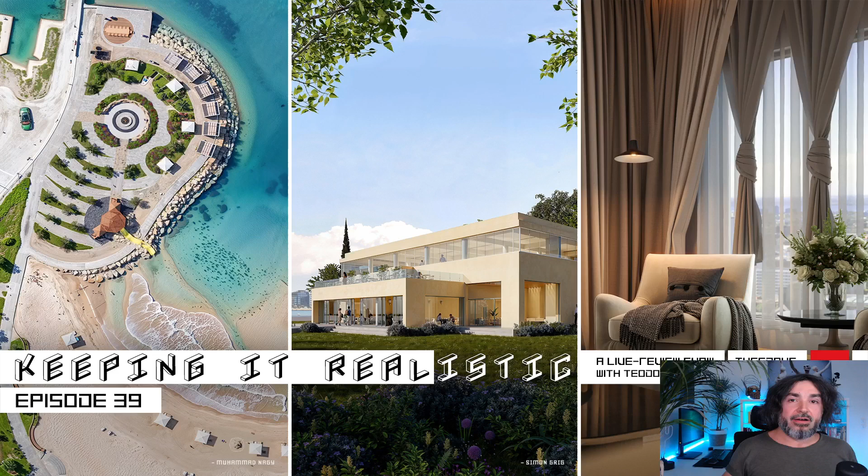Amit says, relaxing for 2 weeks now as Diwali festival is on, taking time for my family and friends finally. Well, this sounds absolutely amazing, Amit, and I'm very, very happy for you because at least in my priority list, friends and especially family is the very top position. So spending time with them is actually great. I also had the chance to do so this weekend because we were at the Lake of Constance, where I used to study. This is the first city which I actually visited after leaving Bulgaria and coming to Germany to study. And we had an anniversary with my former colleagues from the Bachelor Architecture study. So I met a lot of friends and I took my whole family with me. So we also experienced a really, really good weekend. Friday, Saturday, Sunday. So yeah, very happy for you.

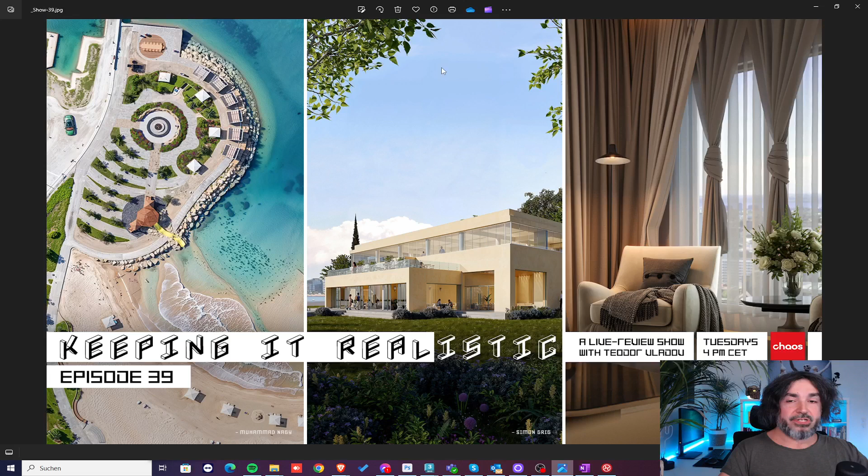Abdi joined us. Very happy to have you here, man. You're right on time because after appreciating our cover image triptych, we'll take a look at our other cover image, this time the Facebook group's new cover.

You know, we recently started doing this, that during the show I present to you a selection of 5 images and afterwards I make a post about it. You can, by the way, find it among the featured posts. It's up here. And when you click on it, you can actually vote for the images that you like the most. You vote by simply giving the image that you like the most a like. In this case, it is the image that won out. It was a very close call. Probably it was a real thrill which image would be winning. In the end, it was Raphael's, and even though I like all of them, I completely agree with your choice, and I think that our new cover looks really, really nice.

And we can, of course, click on it. I always try to place the Chaos Campus logo in a way that it fits within the image, and I think in this particular case it actually does. It's very nice, I love this minimalism, and I think it very nicely fits the group. Also, our first two covers were pretty dark, so having something brighter for contrast is actually pretty sweet. I hope you like it.

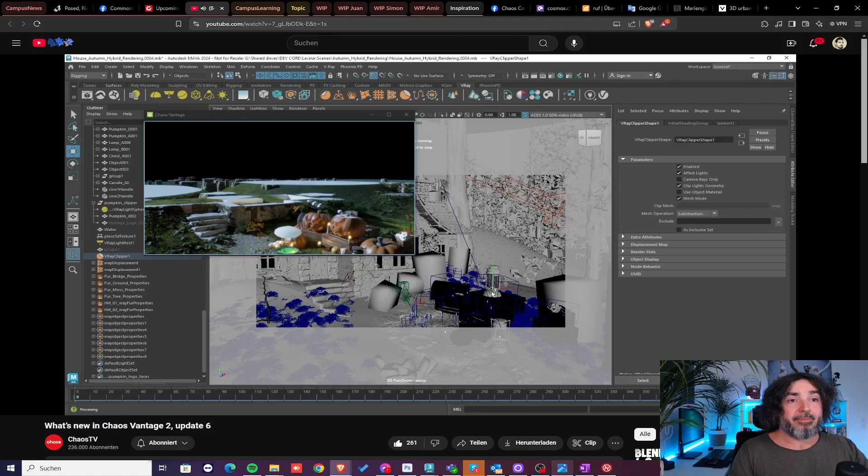We have VR controller support - I'm planning to buy a MetaQuest 3 this year, so this is great to me. Also wireframe overlay, very easy to set up, and I'm very happy about this because from time to time we need something like this. And something that may seem small but to me is actually a very big topic: cameras are now actual objects that you can move around, rotate and so on, which will make camera setup even easier. I'm very happy with this change.

You can just watch the video if you want and see the whole list - oh sorry, I just switched to another video. Just take a look and see what the changes are, but it's very promising. I'm planning to do a scene specifically to test Vantage with next, so I'm happy I'll get to try out most of these new features.

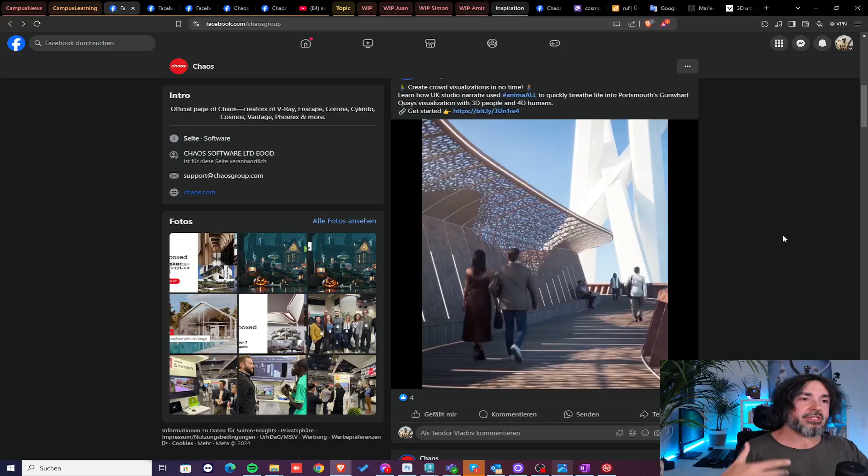By the way, the scene you see here is also the cover image of the official Chaos Facebook group. You know this group, I show it on every show - there's always something new and interesting in it, videos, tutorials, news, announcements. The difference from the campus is that you cannot share your own work within this group, you can just look at stuff or comment on stuff shared by Chaos themselves. But this is where I found a video about Vantage and many other news and articles.

And this is where I also found this one, this very short teaser about the upcoming Chaos Envision. I'll just quickly check the comments.

I see Ahmed joined us. He says, 'Hi Theo, nice to see you. How are you?' I'm very fine. I'm very happy that we get to hang out together today again. And thanks for asking, how about you, man?

Abdi says that will allow a much more flexible way to animate the cameras in a good way. Yes, the new camera as an object in Vantage is something I was missing, even though I'm not much into Vantage. But the times I experimented with it, I always felt it was an issue that the camera wasn't something I could see or move around the way I'm used to in Max.

So yeah, I'm very happy about this change, even though it's not the most significant among the new features. Anyway, back to Envision. This teaser doesn't really show much, apart from Envision being a render engine with which you can also animate, contrary to Enscape which doesn't really support animations. So Envision obviously does, but what is it? It doesn't say anymore.

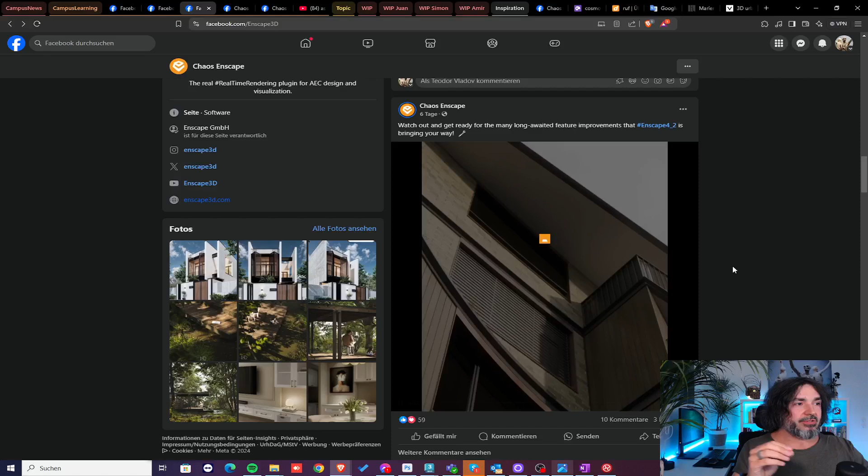I think just because it doesn't support animation and the images aren't that photorealistic doesn't mean it's obsolete. On the contrary, if you want to see something more concrete in your conceptual phase, if you want a good previs solution, or a real-time preview of your concept, where you lead people around like in a computer game, this is a very good way to do this. And I see more and more architects actually using it.

Next, we have Vantage. Vantage is actually more similar to V-Ray and Corona than to Enscape, because it's not a raster engine, it is a ray tracer. However, in this case it is a real-time ray tracer, contrary to V-Ray and Corona. This means what a ray tracer actually does is simulate the interaction between the light rays and the surfaces and their specific surface properties, but it does it in real time. It's once again aimed at 3D artists.

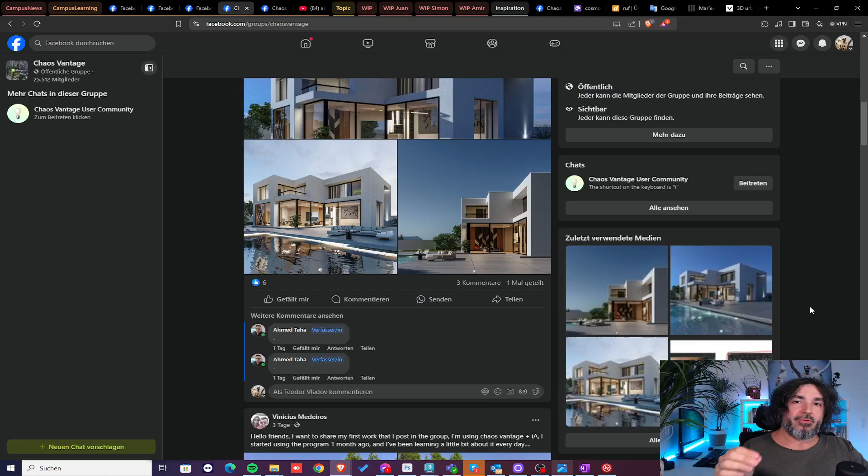It's again very quick and easy to navigate and use. It supports animations, as you know. It's still not quite as realistic as Corona and V-Ray, but it's slowly and steadily getting in this direction. The other drawback is that it definitely requires more computational power, so you need an RTX card, and the better the card is, the more fun you will have using Vantage.

So if you followed up so far, you know that 3D artists or digital content creators have Corona, V-Ray, and Vantage for themselves, the ray tracers, offline and real time. The others, architects, engineers, designers, the CAD people, they only have Enscape, which is a raster engine. With Envision, the way I understand it, they will also get a real-time ray tracer, but it will be more towards their needs rather than ours as 3D artists. It will still be very quick, easy to navigate and use, and it will support animations, contrary to Enscape. And as an architect, you won't need to necessarily learn 3ds Max or Corona or V-Ray in order to use a functionality similar to Vantage.

I sometimes see in 3D groups people or 3D artists who do the modeling work in ArchiCAD, for example, or in AutoCAD, and then they have to go over to 3ds Max in order to be able to use V-Ray or Vantage, which is quite a long way. So these people will now have Envision.

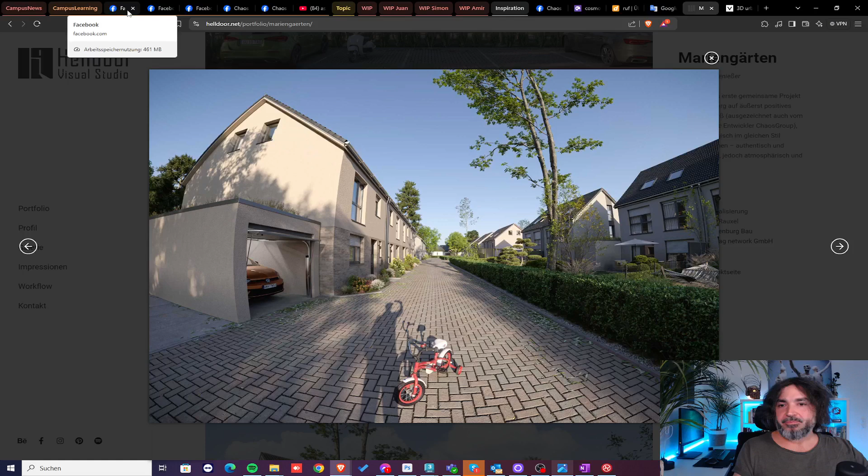Okay, I think we had enough of learning, news, and so on. Let's briefly check out the topic. And this is nothing new, actually. We have a project visualization challenge going in the group currently, and this is what I want to remind you about. There is an official post about it. So if you're up here, among the featured posts, the last one is the challenge for October. And if you click on it, you will end up here.

And there you'll find all the information needed for you to participate in this challenge if you feel like it. So yeah, project visualization, this is what we're doing. What you need to imagine is a scenario where a client reaches out and wants you to visualize their new project and depict it in an appealing way. If you want a bigger, longer presentation about this, just watch the previous episode of the show, where there is even a lesson, let's say, accompanying the challenge announcement.

So more or less, what you need to do are 2 things: model and texture the project. It doesn't matter if it's something existing, if it's something that you found the plans on, or if it's an imaginary concept you came up with. That's everything's okay. And then in the second step, visualize the project in an attractive and fitting way so that it's desirable to the target audience, or even to a wider audience.

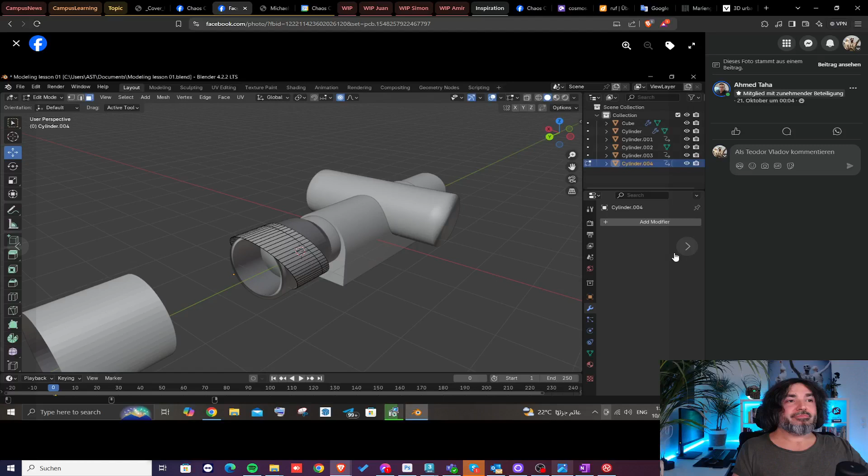He's also shared like a million screenshots, which I really appreciate, but you don't have to do this. You can just share 2 or 3, and that's more than enough. He shared all the steps. This is a campus, this is a community where we learn from each other. So doing something like this is actually pretty sweet. I appreciate this, but don't feel obliged to. Just wanted to tell you.

If he wins, of course, this in the end depends on all the other submissions. But to me, and I'm being very honest here, the participation is already a win. And I know this sounds corny, I know this sounds like loser talk. It's not important to win. It's important that you participate.

But believe me, with going through life with, I wouldn't call it wisdom, but the more I spend time on this earth, the more I believe in such corny stuff, because on the way to a potential win in a challenge like this, you will be faced with a new situation and you have to learn to deal with it. You will definitely gain experience through it. You will face challenges that you have to overcome, and this will also help you grow. Eventually, you learn a new skill, you'll check out a new tutorial. Your self esteem will grow through it, your horizons will widen, and this is something nobody can take away from you. This already is an objective win.

Remember, if you want to climb Everest, you're not in your room one moment and teleported there the next. No, you do it in small steps. You just go to the base camps and walk up in your small everyday steps. And it's the same with growth as an artist. You just need to take your time and do all those small steps, and at some point you turn around and you see how far you've actually gone.

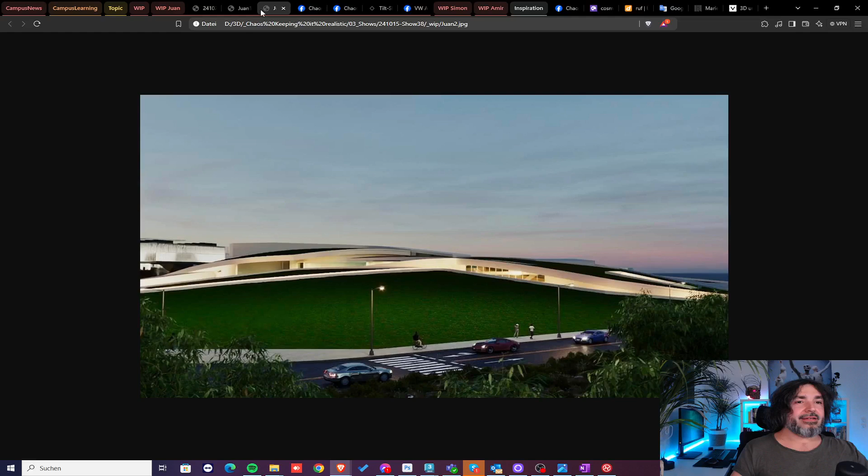In the second phase, it was a bit of a letdown. I gotta be honest, a bit sobering, because the sense of large scale that we just saw on the very first part of the project was completely gone now, and we just had a hill with some cuts in it, and this wasn't impressive anymore at all.

Luckily, at the third stage, which is something we talked about on the last show, he returned to the initial concept, showing this structure alongside its urban context, which makes a lot of sense. So also the sense of scale was now back. However, the angles were a bit flat, so it was difficult to understand and see the whole structure from those flat angles. And also the city looked kind of generic and lifeless, missing this lived-in feeling of the big city. So today we will talk about stage 4 of this project, where the two main issues I just mentioned were addressed and, if you ask me, properly dealt with.

He writes, work in progress. Hi friends, I present to you the progress of my project. I changed to a more appropriate view for an urban scale project, and I think I managed to give it more life and make it feel more like a city, taking into account all the advice.

I absolutely agree, and I'm not the only one here. Danushka says, hey Juan, huge leap in progress in my opinion, really cool work. Amit says, hey Juan, it's a nice and huge progress from the previous versions. And it definitely is. Let's take a look at why.

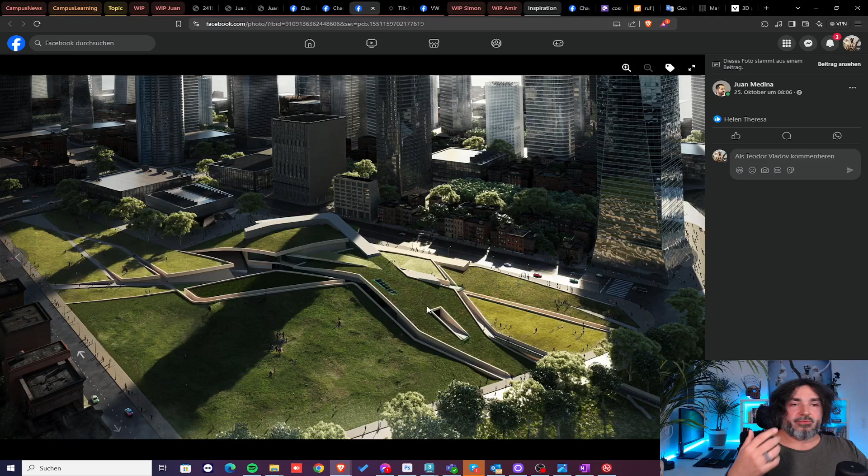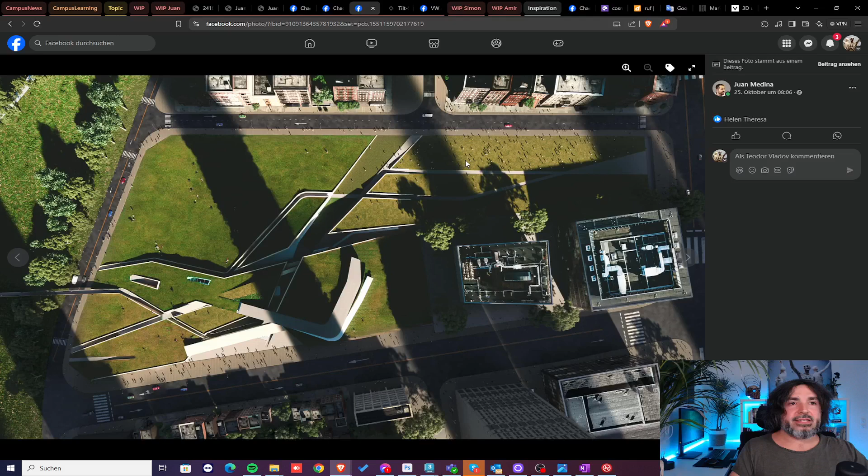First of all, the urban context is once again very present. And with a structure like this it's absolutely essential, because it helps better understand the concept behind it, and in turn the concept integrates way more harmoniously. Until this point, to me all those lines were more or less random, just so the thing looks cool. Now that I see it from above, I can actually understand the design. I see that all the entrances this building has are situated where we have some urban openings, or some pedestrian crossings, where we have a lot of people, which of course makes a lot of sense. Also, it seems like this structure is oriented around those two buildings, which I assume were pre-existing here, or not, I don't know - this is something one should say - but suddenly we get to actually understand this whole thing.

And this is huge. The next topic is that the city now really feels lively. Prior to this phase, it felt like a generic static background. Now, if we take a look at the images, you see how with those lots of different buildings with different facades, we have this lively street infrastructure.

We have the street markings, the pedestrian crossing, the street lamps, all of this. We have a lot of urban green, and we have tons of vehicles. It's great to see not only cars, but also a van here and there. I would also recommend adding a bus or a lorry, a truck, whatever you want to call it, so that it looks even more random and lively.

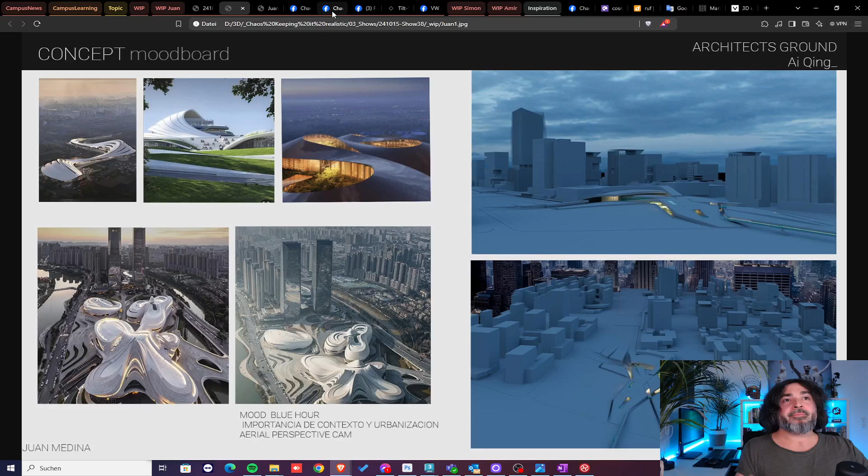So now let's take a look at the issues and the stuff that you may need to work more on. First of all, the major issue to me, and not only to me, to your fellow artists in the comments, is the lighting here. First of all, it is too bold, it is too contrasty. If we look back to your references, you see how soft the lighting is on all of those examples. Even here, where we have direct sunlight, you see that there are no shadows that interfere with the buildings depicted, the buildings that we want to focus on. In your case, however, the structure gets literally overshadowed. This is what overshadowing means, is the shadow over it. It's just not good. And why? Because your structure is already very fragmented.

Let's try to showcase this a bit. Okay, so we have many lines. I'm sorry, I'm drawing with my mouse.

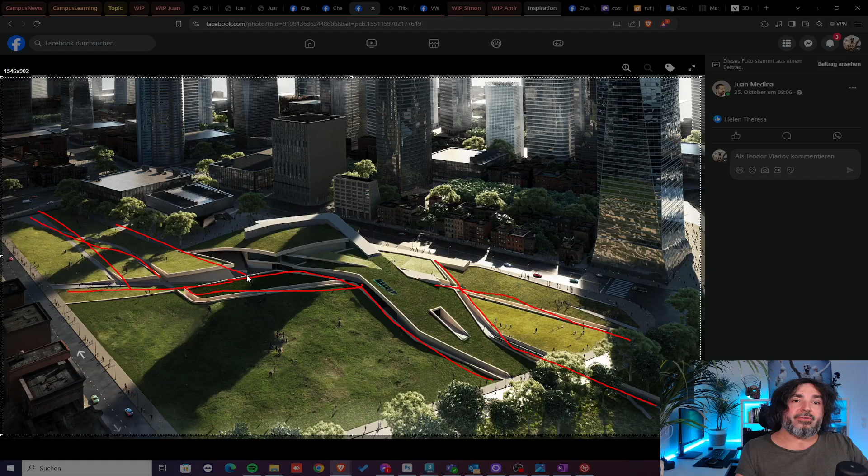But you see all those lines that intersect here. There are really, really many cuts, sections, leading lines, whatnot. And what you do with those shadows is you add further ones. You add further structure and fragmentation to your already very fragmented concept. You shouldn't be doing this.

I understand this is probably lighting that could happen in real life at some time of day in this particular city. But if this is the case, then this simply is not the proper time of day to depict this building. Remember, professional photographers, half of the work they do is not the photo shooting, but the preparation for it. Depending on the project, they would sometimes spend a whole day around an exterior building they have to photograph, walking around it, trying to see at which point which light comes where, when there are lots of people in front of the building, where there is nobody, and stuff like this. So you gotta experiment with this as well, because in the final phase of your work, you are actually a photographer, a virtual one, but still.

So what you can do, of course, is, as your fellow artist suggested, change the sun angle. If you did a daylight simulation here and can't just randomly change the sun angle, try to go for maybe a noon time, because at noon the sun is usually quite high and the shadows are quite short. If you are free to change the sun direction however you please, just rotate it so there are no long shadows atop your structure, but somewhere on the side. I understand why you like those long shadows, because especially with people it looks even more lively and atmospheric. But if it doesn't work, shadows cannot interfere with the main hero of your scene.

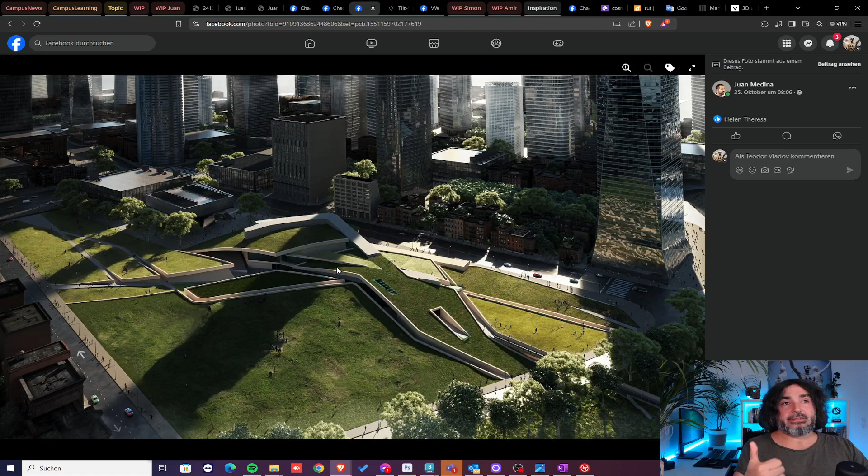Of course, it will look even better with an evening mood, but also during the day, because now you've moved the camera further up. And now that you did so, we can actually see through those gaps what's on the inside. For this to feel safe and welcoming to people, you need to show that there is light inside. First, the light will make sure people understand that something happens on the inside - these aren't just cuts and ways through this field, something is actually there. Second, people will know they can feel safe going inside, because if I look at this or this here, it doesn't look that safe. It's dark, and honestly, the opposite of inviting.

Now, when we talk about the lawns, Amir mentioned it, and in the first part of my review I also said it's a good idea that they aren't exactly equal. But the way they are now, they're too different, which makes for a restless, disorderly look of the whole structure because there's just too much going on. Remember, you already have all those cuts and sections, so you don't really need much more for this structure to be interesting. If you add more, at some point there's a lack of harmony in it.

Also, this dark green lawn - it seems like it's been done with AI, most probably, or it could be matte painting. Whatever it is, it looks too wild, too unkempt, like it belongs on a mountain slope, but not in the middle of a big city.

So my recommendation would be to give your lawns a more uniform look, the same type of grass. I personally like those parts here, and I'd recommend taking the grass you've used here and using it everywhere. Of course, you can do slight variation - for example, to the saturation, hue, and gamma. You can easily do it with the Multi-Map in Corona or the Multi/Sub-Texture map in V-Ray if you're a V-Ray user, so there's still some changes.

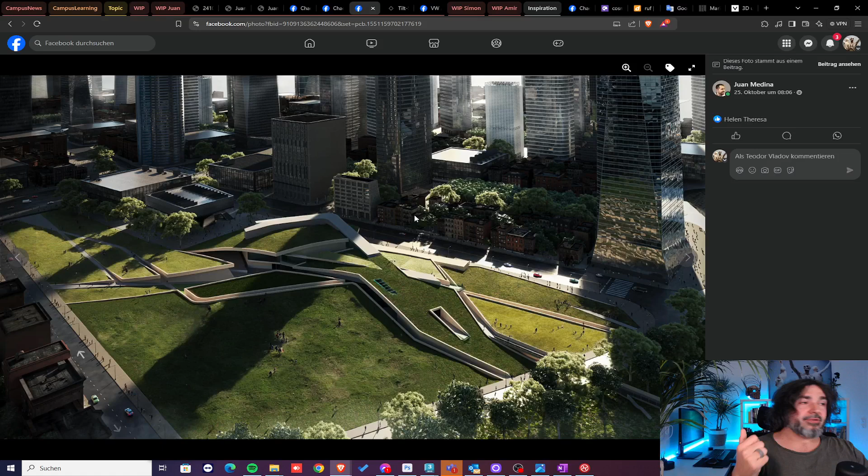One last thing, the background. Currently it's visible that your surroundings come to an end at some point, and this isn't good for realism and authenticity. What I recommend is either use a backplate, maybe placed on a semicircular plane, scatter some further generic buildings or trees in the back, or try an AI solution—see if it can fill those gaps with some city continuation. It's really important for upholding this big city atmosphere you're establishing here.

And I think that was it. It's a great improvement since last time. I was very happy to see this fourth state of the project, and I'm actually very proud of your progress and hard work. It's a huge project—a lot for a single artist—but you're doing a great job. Similar to Amir, I'm also waiting for your next phase or the final outcome, whatever comes.

Juan says, thanks Theo, appreciate it. Amir says, good knowledge sharing on the greens, Theo, appreciate it. You're very welcome—this is what I'm here for.

Okay, let's continue with another work, this time by Simon. You're also here, man—I saw you in the beginning. I hope you're still here because we're now an hour in. So this isn't an ongoing one; this is a new project and almost finished, or at a very advanced state for sure.

Simon writes: work in progress, hi all, just a bit boring building, trying to make it kind of interesting. It's located in the port of Athens, Piraeus, Greece. Rhino, V-Ray, and Photoshop for images, Runway for the video, just based on the existing renders and some simple prompts. Looks promising, still some hallucination as with all the AI out there. Comments are welcome. Have a nice Friday.

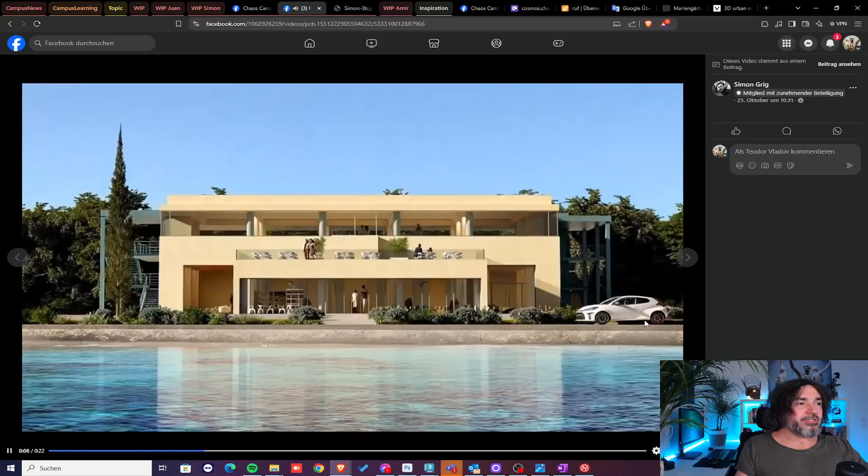And finally, we have the video, which simulates a time lapse. I probably should remove the sound just to be sure. It brings all those three situations that we just saw to life, but adds more dynamic and more emotion. You see the sun setting down here. To me, it's actually a lovely experiment. It's good to know what AI is actually currently capable of.

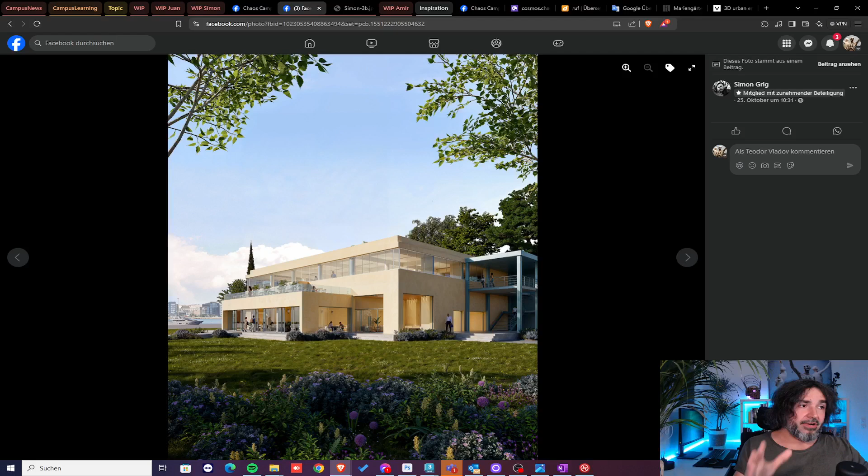So after going through all of this, I would say the framings are actually a big quality of this project because they help emphasize that it's not only the building itself that we have to look at, but also its location, its beautiful surroundings as well. They are exactly as important.

Sorry. So it's like we can analyze the second shot for this. Obviously, you can frame a shot like this, or like that, right? Because what we did cut off is a part of the sky, but we still see it here, and parts of the sea, but we still have a part of the sea still visible. So we didn't reduce the information provided to the viewer by going for a framing like this.

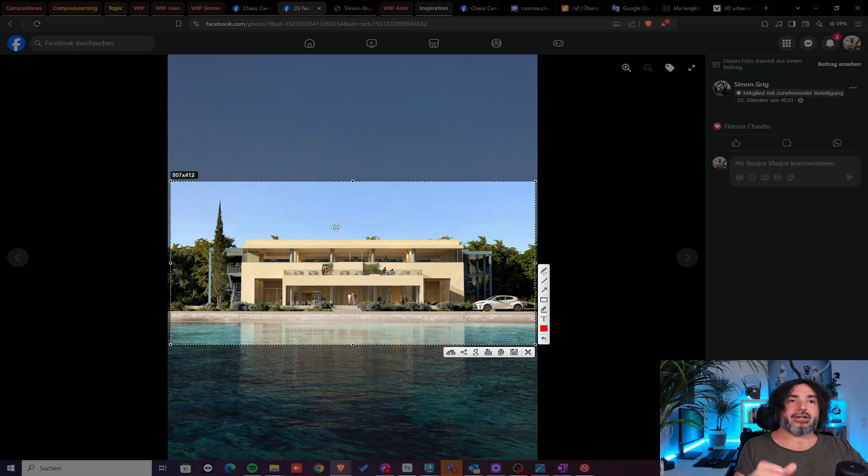However, what we change here is the message of the image. The message of an image like this is it's about the architecture. Yes, there is some greenery, there is some sea, that's good, but take a look at the architecture. While you go for this type of framing, however, it's look at where that building with this beautiful architecture is situated. It has the sea in front of it, and it has the greenery and the blue sky above it. There is so much air to breathe there. This is a different message, and something like this is important. So I think you chose the very right framing here.

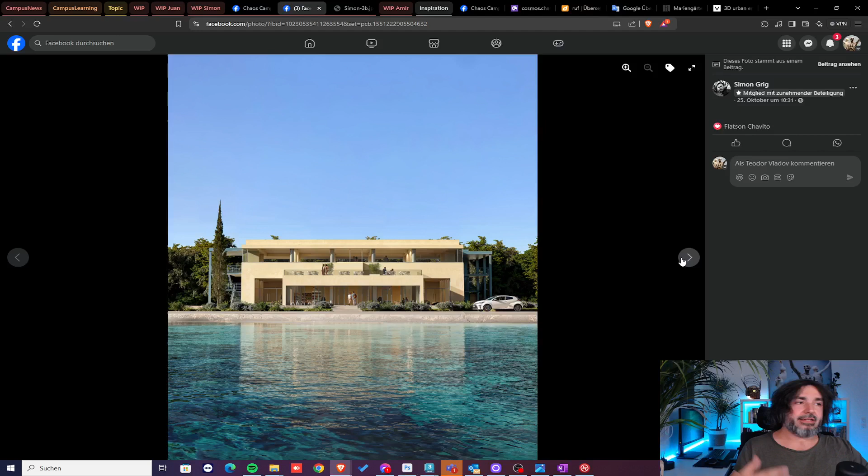Other than that, lighting, materials, modeling, scattering look good to me, especially the lighting because it's different on every shot, as I said. Now let's take a look at some issues or things that you may want to do.

So generally, I find the interior to be a bit too empty. I'm not sure what type of building this is exactly, but it can certainly profit from some interior. You see, there is a cafeteria or whatever this is down here, but some of the other rooms seem completely empty. So I would say add some lamps or wall art. I mean, if the project is finished, you can do whatever you want. If it's not finished, maybe you can convince your client.

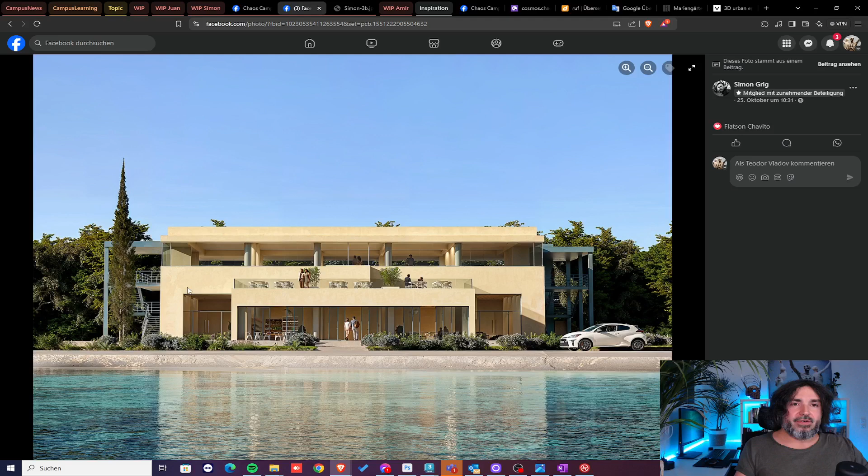Another thing that I would say about interior is that it seems like you have the same material on the in and outside of the building, which I'm personally usually not a huge fan of. I would recommend going with a different material or a texture for the inside and the outside area, so that it's more comprehensible for the viewer to understand what's an outdoor area and what's an inside area.

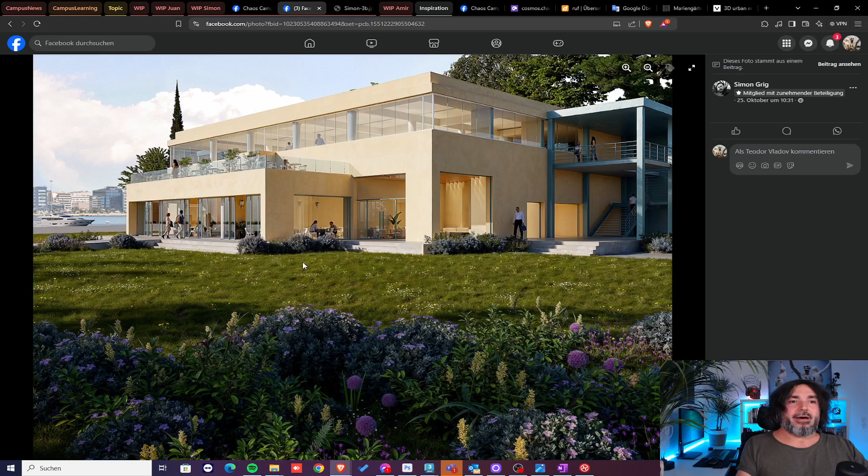Another thing is the grass on the very first shot. Let's go back to it. I must admit I'm not a huge fan of it. First of all, it looks a bit generic. Secondly, it's very wild and unkempt, and this is kind of strange given how many stairs lead into this lawn. You would think that it would be nicely cut and trimmed so that people can actually go there and use it, lie on the floor or walk through it. But the way it is now, they probably won't be doing this.

Next thing is I find these white and yellow flowers to be kind of distracting. Why? Because you already have a lot happening at the bottom of the shot. You have things happening at the top as well, and a lot is also going on in the middle. So the blue sky here and the grass field here should actually act more like counterweight, like buffer zones where not so much happens, in order for the image to not become unbalanced or too heavy. With all the uneven ground underneath the grass and all the different grass clumps and all the additional flowers, too much is going on in this area.

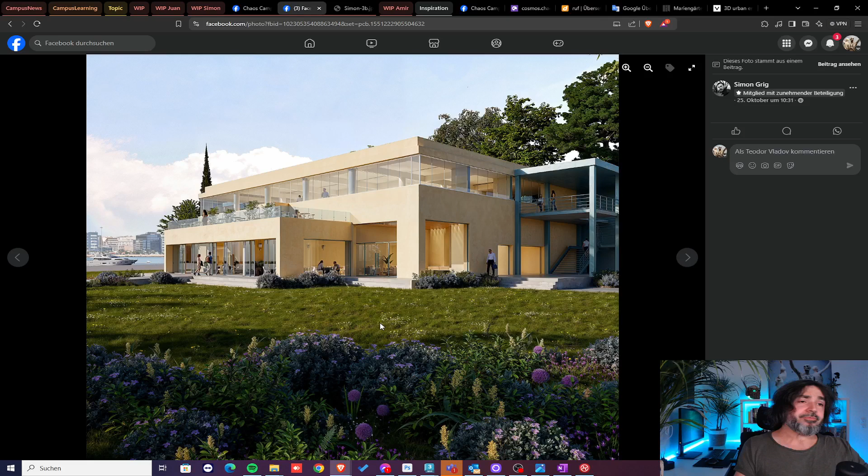So I would recommend just picking a neatly cut grass and putting it here. And additionally, pay attention to the color, because the current color that this grass has is kind of too much yellow in it. We have yellow here up as well because we have translucency.

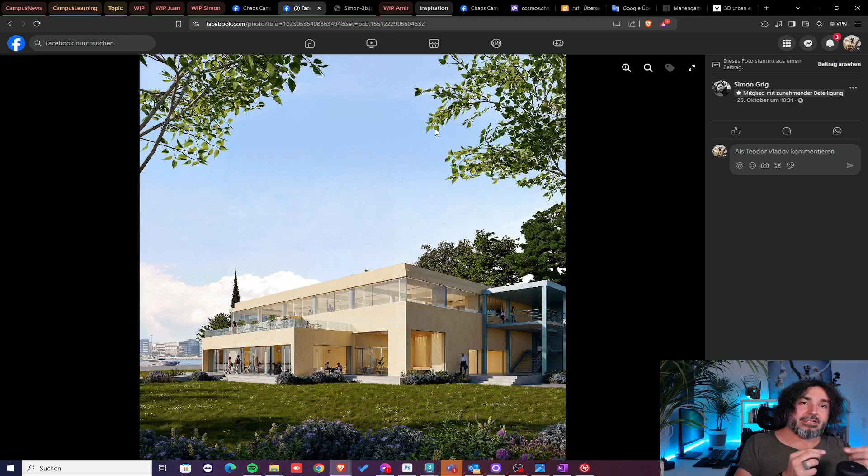As you know, especially with foliage, if we have translucency on it, we usually give the translucency map a bit more yellow so that we can simulate how the light is traveling through the translucent leaf. However, your grass here is almost like autumn grass, like it belongs in a different season, and it doesn't go well with the green on all those plants down here. So just take a cut grass, scatter it, and make it more green and less yellow, and I think it should be better.

So what I would do if I were you is extend the cropping upwards a lot until maybe a rule of thirds applies, and then also extend it a bit to the left, so that you don't cut the very edge of this fire escape stairs. So it would look more like this. I think this way it is more balanced and somehow nicer to look at, and the proportions and ratios are better. Let me know what you think in the comments.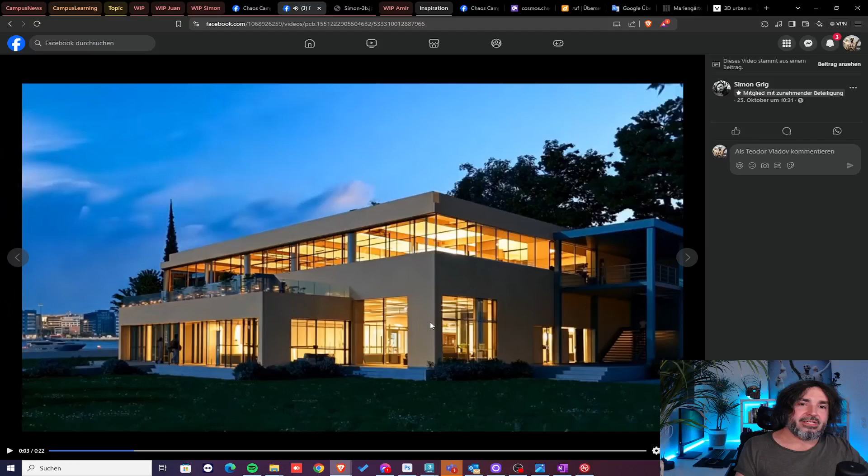As for the animation, it is of course something special. It feels a bit like a fever dream. I mean, most things make sense, but you see it here, we had those people going around in a time-lapse mode, and then we have those at the entrance that don't move at all. This, of course, doesn't make that much sense.

So if you want to do something like this, remove all the static people before doing it, and then do the prompting so that there are people within the limits of the building. Then we have the second shot where the people, once they enter the building, they start morphing, which is, of course, kind of creepy. It's fun for us to watch it now, of course.

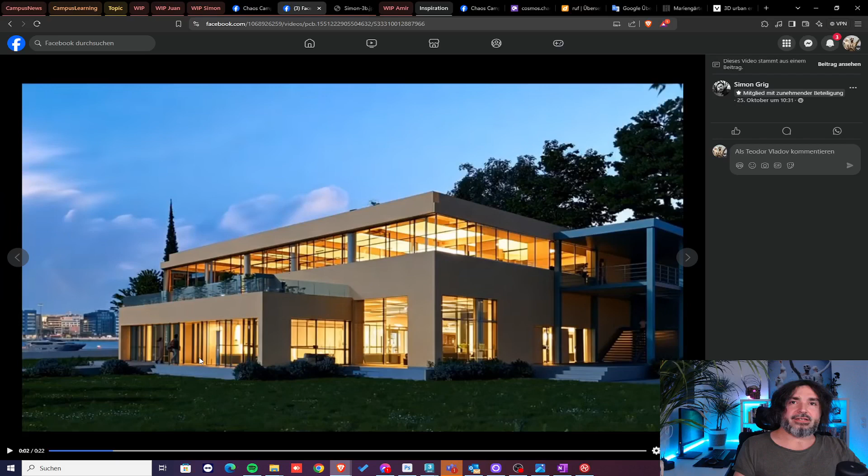What should I say? It's a great experiment, but if I were you, I wouldn't share this video in my portfolio or on some official channels, because it can be bad for your reputation. Somebody who doesn't understand that you're just experimenting, like a potential client, may think this person doesn't see obvious mistakes, and maybe the explanation that it's still some hallucinations as all the AI out there wouldn't make sense to them. So if I were you, I would leave the video out, but I still think it is an awesome experiment.

With that being said, to me this is another great project of yours. You've been very active lately and sharing all those really cool projects. So the only thing I have to say is please keep them coming. They're a pleasure to look at.

So thanks for the advice. They're all really helpful. I admire Mir because they many times do these weird framings and I'm trying to go out of my comfort zone.

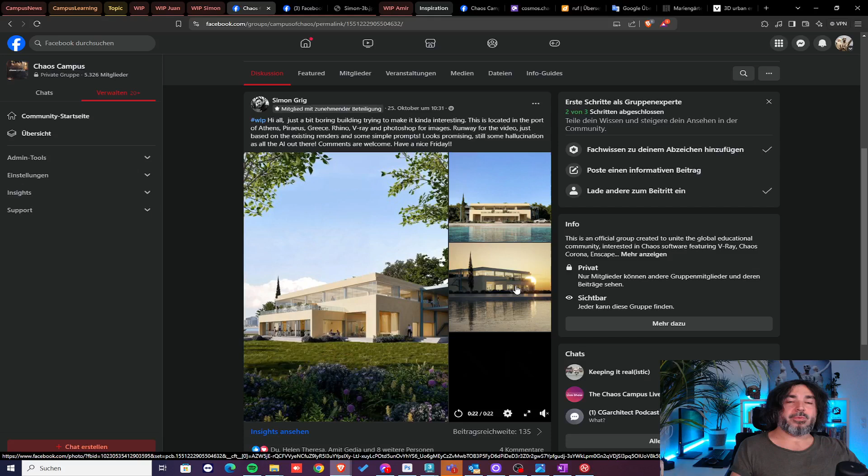You mean like on the third shot? Well, of course, you can do this as you please. Sometimes breaking the rules is also pretty cool. At the end of the day, it's up to you.

If you like the image the way it is, then it's good. I personally like it more like this because to me the building still is the more important part of this image, and I also like the sky gradient as well. If it was all yellow, I probably wouldn't like it as much, but I like how it starts going into blue. So to me this adds some further dynamic, but this is one of those things that it's up to you. It's subjective. Just do what you feel like. I'm just sharing my opinion here.

Let's move on to the last work in progress we'll be talking about today. It's by Amir, another one which is not ongoing. It's new, and it seems like it's in the light balance phase. It's not the very early one because there's already a lot of detail, but it's still not textured. Let's see what he has to say about it.

Work in progress, it's an administrative building. Feel free to comment your feedback to improve it. And he has tagged me.

Now Amit asked a very reasonable question: Hi Amir, it's a good looking shot, but I'm not sure whether you just shared this for us to know that this is the project you're working on, or do you require any help with the project? Kindly specify if possible. This is very reasonable because, as we said, we will be doing those work in progress days, we also stated that we don't want people to just throw the current state of their work out there and expect everyone to start commenting.

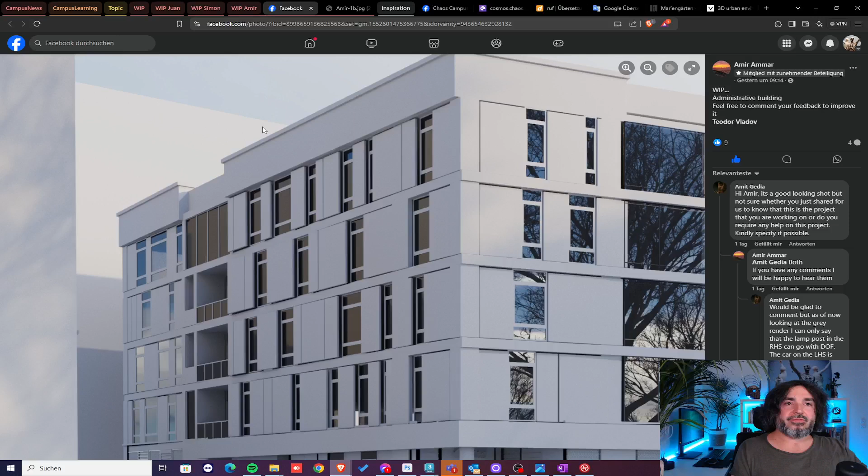The next topic is the modeling, and there are some different issues here. First, you have some hovering elements — this hydrant, the building to the left, and even some facade panels seem to be levitating in front of the facade. Next is the Volkswagen Beetle — you see a part of it here to the left and one to the right. I love this car, it's really cool, but nowadays it's also pretty rare, so seeing two of those in one scene is highly unlikely. I'd suggest you keep one, but swap the other for a more casual and regular car.

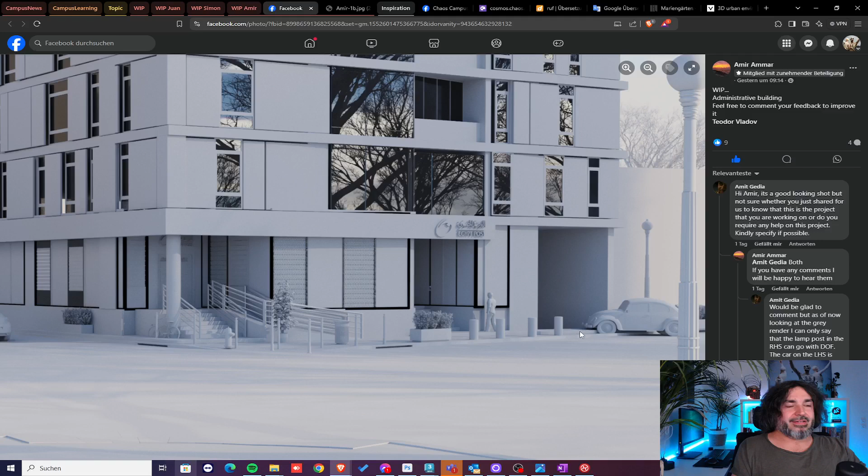Next, the surroundings obviously need a bit more detail — you need proper curbs, and a ramp for this garage entrance, because currently the Beetle really needs to climb over the curbs or sidewalk, which doesn't look comfortable or safe for the car. And of course the surrounding buildings need facades. When it comes to more detail, the interior also needs it — you can hint at it with 3D assets from the Cosmos library or your own, or as Amit suggested, use a parallax solution to fake it.

Parallax solutions are, of course, a huge time saver, but you need to know that if you're a Corona user, they sometimes aren't best friends. You may want to look into that and do some research if you can now use Corona with parallax without any issues. But this would be a legit solution as well.

Talking about things Amit said, the depicted season is a very good point, because what we see now is a branch without any leaves. We also see reflected winter trees, and also this soft low lighting. So I assume what you depict here is more or less a winter season. If this is winter, you need to make sure some of the plants don't really go well with winter, and that people walking around are properly clad for the season. If not, you may need to reconsider your greenery and your reflections as well.

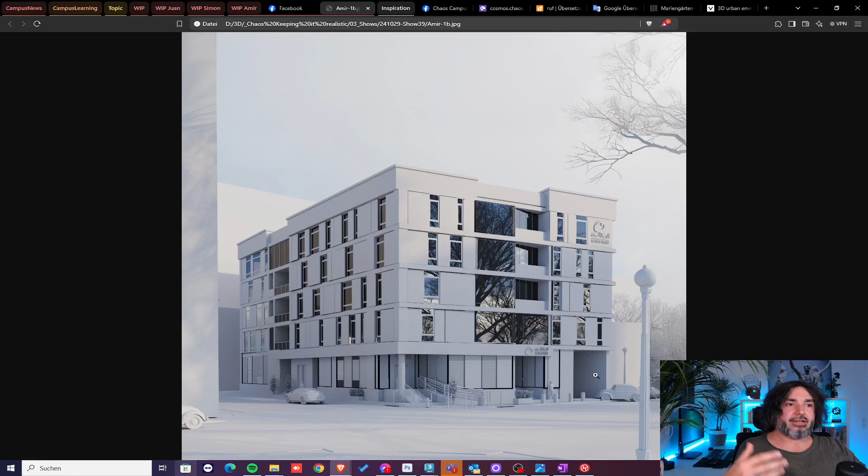And lastly, it's the framing. Currently, the framing is very architecture oriented, because all we see is the building and just small glimpses of the surrounding urban situation. What the current framing says is: look at the building. Yes, there is some situation, but it's not important. Look at this building and its architecture. If you want people to also understand the urban context in which this building is placed, you need to extend your cropping a bit, something like this. You can extend it even more to the right, since that's the main direction this building is facing, and also a bit to the top so it's not so encapsulated in this very tiny framing.

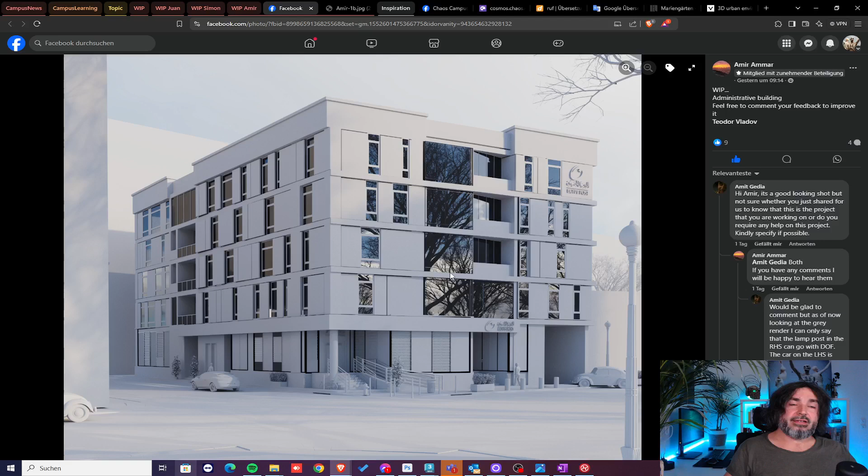But it is okay the way it is. And that's what I have to say, because you didn't have a specific question or topic to talk about, which is why I keep it a bit more general. To me, this is a very promising project of yours, and I'm looking forward to the next phase of it. But make sure you take the time to actually work on the details and make everything make sense, work, and just look good. Fingers crossed.

I see Muhammad joined us. Greetings, Teodor. Happy to watch the interesting episodes.

You'll be even more happy to see what I'm going to talk about next, because we finished the work-in-progress projects and now we'll take a look at some inspiring projects shared in the group within the last two weeks. Last time, as we started our inspirational phase of the show, we started with a seaside resort, an oceanside resort actually - the Zanzibar resort. And today we'll also start with a resort, at least I assume it is. Muhammad, you're here, tell me if this is the case.

But this time it is the Bukshanopur Palace in the Kingdom of Saudi Arabia. Muhammad says: hello campus, we're excited to present some of the beachfront CGIs of Bukshanopur Palace in KSA. Modeling, art direction, and visualization are crafted by Nagy Studios, thanks to 3ds Max, Corona, and Photoshop.

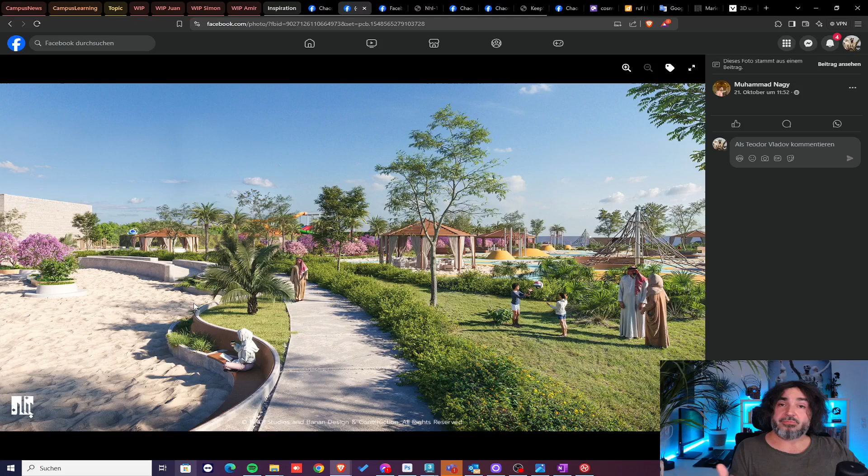Just taking a look at those thumbnails, we can already say this is a huge project involving a ton of work, and despite that it is absolutely wonderfully executed. It's incredibly detailed, as you can tell. It's very atmospheric as well, and has great modeling, texturing, and scattering too. For me, however, the highlight here are the bird view shots - they are simply amazing, truly fascinating.

Especially my favorite, this top-down shot, because not only is it very authentic and realistic looking, depicting how nature and man-made structure come together, but it's simply beautiful to look at. If this was an image of mine, I would just plot it out, put it in a frame, and hang it on my wall, because this is something beautiful. Leaving aside all the architecture and the project itself, it's just a good looking image, a pleasure to look at, at least I find it to be.

What's even more fascinating with this one is that apparently no AI has been used. And I don't say apparently because of what Muhammad told me, but because this is the way I understood it - that everything you see here, which looks so incredibly realistic, is actually the result of matte painting and not AI. Muhammad, please confirm if I got it right or correct me if I got it wrong. But yeah, I think this makes it even more impressive, honestly.

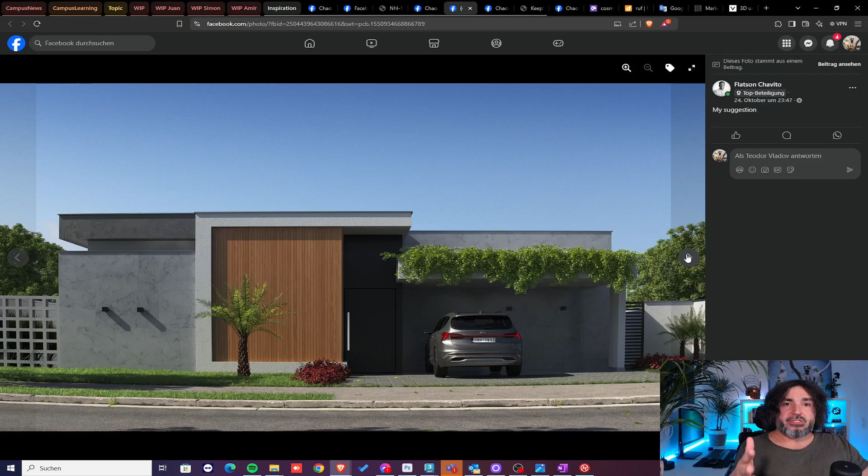Now, great description as usual. Flatson's descriptions are always a pleasure to read. Now let's briefly check the images that we have. And I would say we already see some really solid modeling, fine materials, nice framing, lighting, some scattered leaves for a more authentic look, and also good AI enhancement as well.

Sure, there are some small issues here and there. It seems like the front wheels of the car are somehow hovering above the floor. And personally, looking at the last shot, it seems like the asphalt and especially these pavement textures are a bit overscaled, but these are no big issues.

To me, the bigger issue here is that you are presenting the viewer, in this case us, two different versions of the project. This is what you describe in your description. The client opted for a more simplified look of the facade, and you thought that adding some more plants will look better, and this is your version, the way I see it. However, what you did here is a bit of a no-go because you didn't keep the same conditions, and this is a rule. If you present two different versions of the same thing, you need to keep doing this under the same conditions. So you need to keep the same camera and the same lighting.

And in your case, both are different. And as you can see, given that we have the difference in those two images, it is very difficult for the viewer to decide, because I may like the lighting here, but I may also prefer your version with the plants. But given that they have different lighting conditions and different cameras, these images aren't that easily comparable. So please keep in mind in future, if you want to present two different versions of the same thing to somebody, keep the conditions the same so that people can actually easily decide.

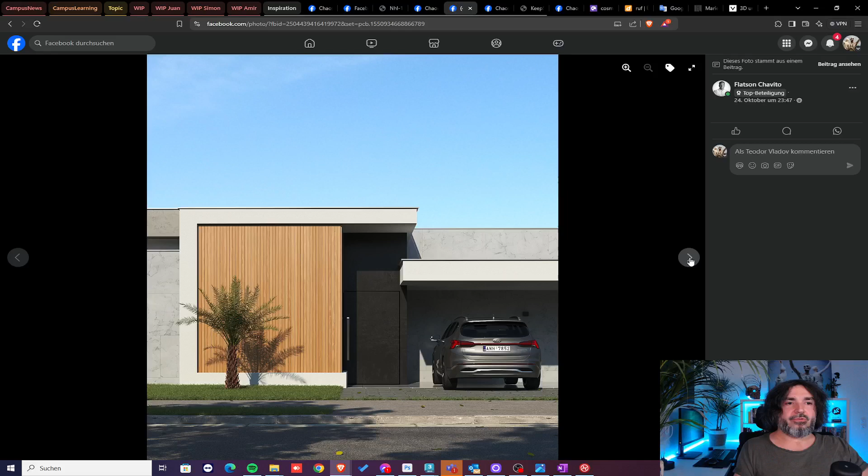But this is definitely not what I wanted to show you this project for. So we just mentioned that Ricardo was giving feedback, and he also gave feedback to this project by Flatson, and I will read it now.

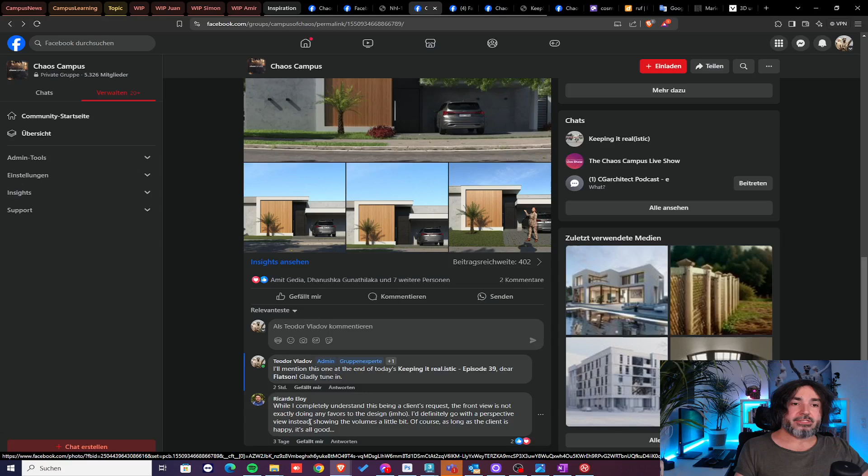He wrote, 'While I completely understand this being a client's request, the front view is not exactly doing any favors to the design, in my humble opinion. I definitely go with a perspective view instead, showing the volumes a little bit. Of course, as long as the client is happy, it's all good.'

And I absolutely agree with this. This definitely isn't the most exciting facade that I have seen in my life, and it definitely also doesn't provide any further info about how the house actually looks like. Is it small or is it big behind this facade? Is it flat or is it placed on a hill and it has an amazing view? We don't know anything about this.

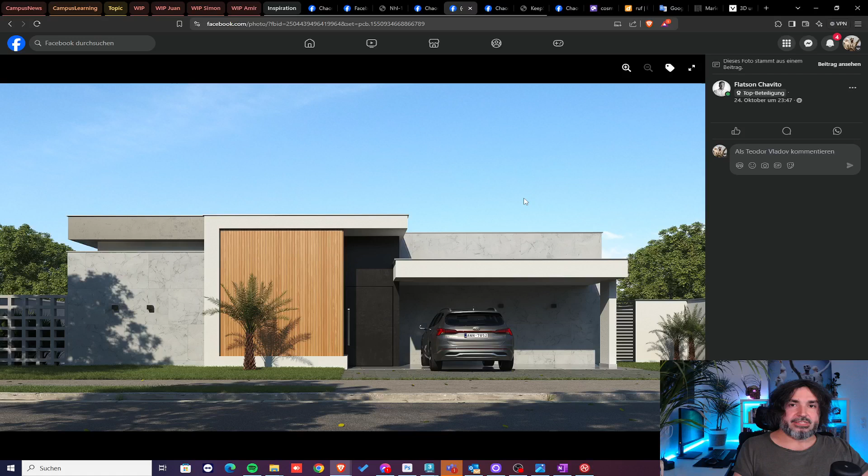However, sometimes we gotta deal with situations like this. We have those limitations by our clients and those rules set by them, and even sometimes we have unattractive stuff to work with. This is why I really love what Flatson did with this very last shot. This is the highlight for me in this project. Because the facade is still the same. It didn't get more beautiful and exciting in the meantime. However, what Flatson added here is atmosphere and storytelling.

How? With a realtor. I assume this is a realtor or the host of some show which is currently presenting the property. Like, take a look at this.

She has great body language because she's pointing, literally pointing at the house, which makes us focus on it. Maybe they're making a promotional video as realtors, or maybe this is some type of a show. It doesn't really matter—the woman is in the middle of something, and we get the impression that she's showing us the house.

And then we have the cameraman. We don't see him, but we see his shadow, and we know that he is filming or taking photos at least. This adds to the depicted situation—it adds so much dynamic and excitement, and at the same time it takes away some of the unwanted attention on the facade, because the facade already takes half of the image. So whether we want it or not, we see it and can focus on it, but at the same time, it's not that interesting to focus on it alone.

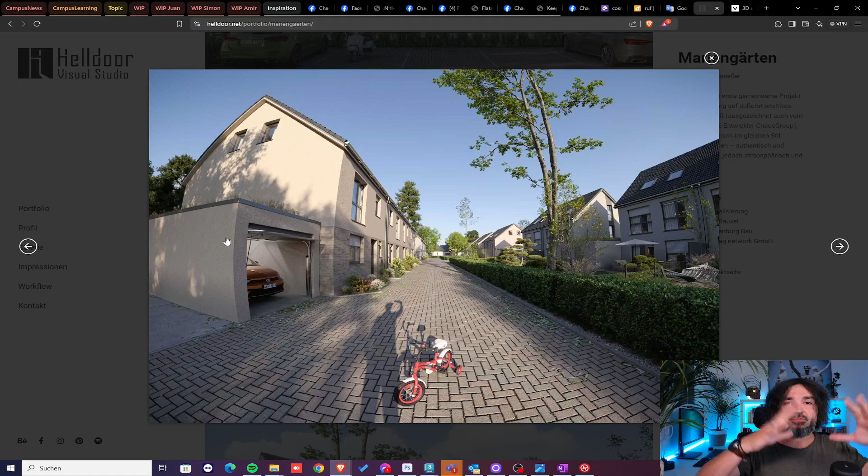And this is why we see them. And the way we see this person here makes it way more relatable to the viewer. Like the viewer themselves are standing there and looking at this situation. And suddenly, with all of those tricks, the architecture, you can still see the architecture very well. You see the density of the houses, you see the way they are, you see the wall structure, and then if you see the full HD image, you'll see even more details. So you can still see the whole city planning situation and stuff, but this is not what you immediately focus on, because in this case, it's not that beautiful to look at.

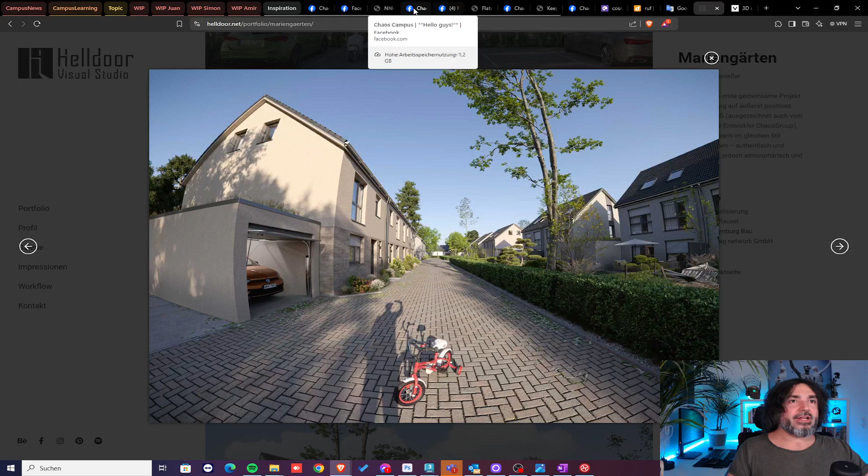And you focus more on what's here in the beginning. And this is this type of trickery that you learn with experience, that you can profit from when dealing with situations where everything is not that great at the first place, or when you have some limitations or some rules like Flatson needed to deal with. So yeah, I really enjoy this one. I think Flatson, you needed to deal with a difficult task, but you pulled it off and handled it very, very well. This is why I wanted to show you this one.

And yeah, it's time for the final one that I'll just briefly show you. This is a project that was shared yesterday by Ahmad. It's a great commercial work. It's called the Fiscal Hub. And he writes, I'm thrilled to finally showcase the renders I completed over 6 months ago for the Fiscal Hub project. It's been a privilege to bring the unique government facility to life through 3D visualization. Using ArchiCAD, 3ds Max, and V-Ray, I crafted the building, surrounding landscapes, streets, and atmosphere to highlight its modern design and purpose. Excited to share this journey and see it come to life in visuals. It's a municipal building in Iran. So let's take a look at the images.

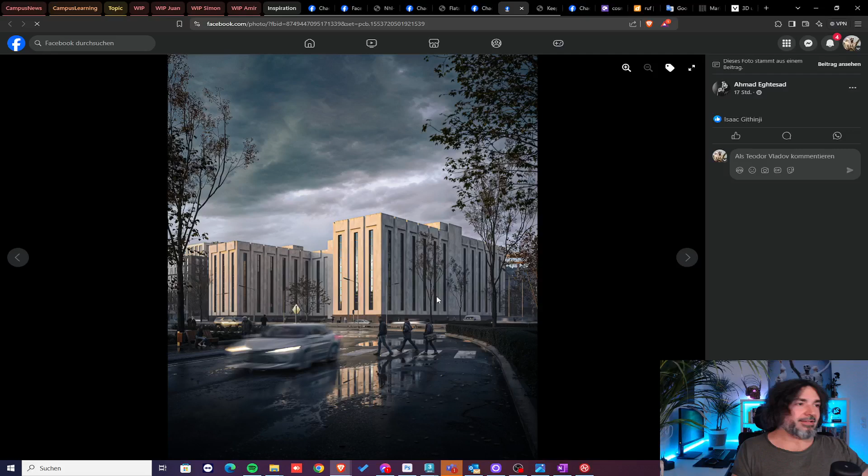Ahmad knows what he's doing. This is immediately visible by the images. Very skillful execution, beautiful framings on all the shots, great looking materials. Just take a look at the street here. It's wonderful, very realistic. The street space is just on the first shot as well. The first street space is just perfectly executed. Also, exciting lighting scenarios as well.

It's not only the same thing, but suddenly we have an evening shot where we see how this building looks like at night. However, the highlight to me here is this, how should I put it, what Ahmad achieved here in terms of situational perception. What I mean by this is what we have here feels like an actual massive government structure in a dense urban environment in a big city. And this is exactly what I think he was portraying. Despite not showing any bird views or tons of buildings around, it feels like it.

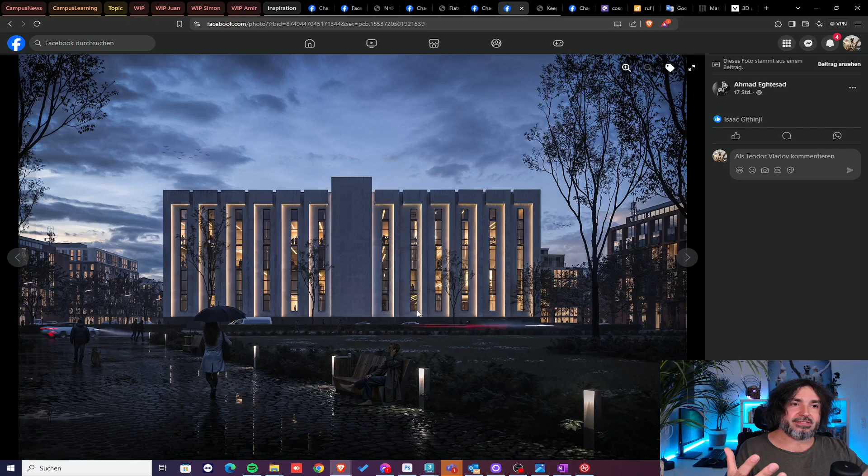And it's not only because of this building itself being massive and big, but also because of the infrastructure and densely populated surroundings as well, and all those people in the parks walking their dogs or just strolling around, all the cars. This is great.

And one thing that is even greater is we just talked about subliminal messages, right? So let's take a look at the subliminal message here. I'll go to this shot. This is a municipal building, like a government building, a state structure. And as such, it needs to radiate stability, because the state needs to be stable for people to trust in it, right?

And when does something look stable? I knew you got it right. It's when it doesn't move, when something else moves. So you see the moving cars, and you see how even more stable and massive this building looks like compared to those motion blurred moving cars. So it's a simple trick once again, but it gives you the impression of solidity, of being there and not moving away in any case. And once again, for a state structure, this is actually essential.

So yeah, wonderfully executed commercial work that I think Ahmad should be really more than proud of. And I'm looking forward to the next one, honestly. And I think before we part ways, it is only time for me to show you the 5 contenders for

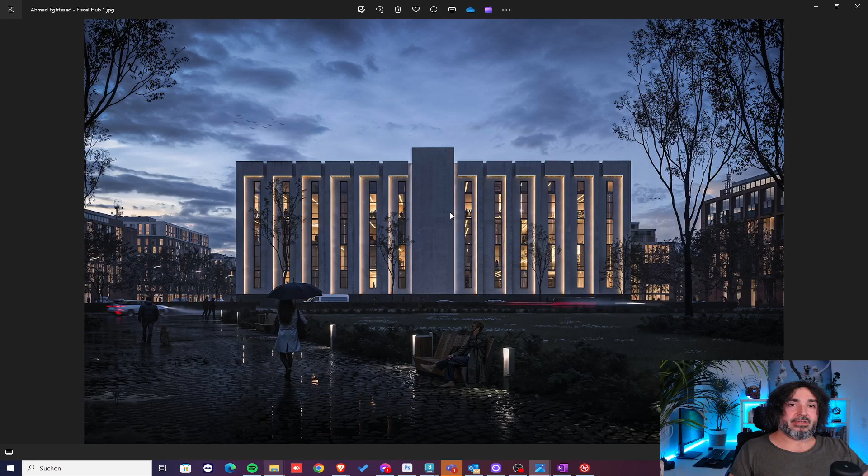We will start with an image that we just saw, Ahmad's project Fiscal Hub. I really like this one. I can imagine it being a very cool cover image for our group with a Chaos Campus logo atop of this one. But this goes for every image that I'm going to show you here. Anyway, this is a difficult one to pull off because it's an evening shot, so there is a lot of work involved in making this work and look believable, and I very very much like it.

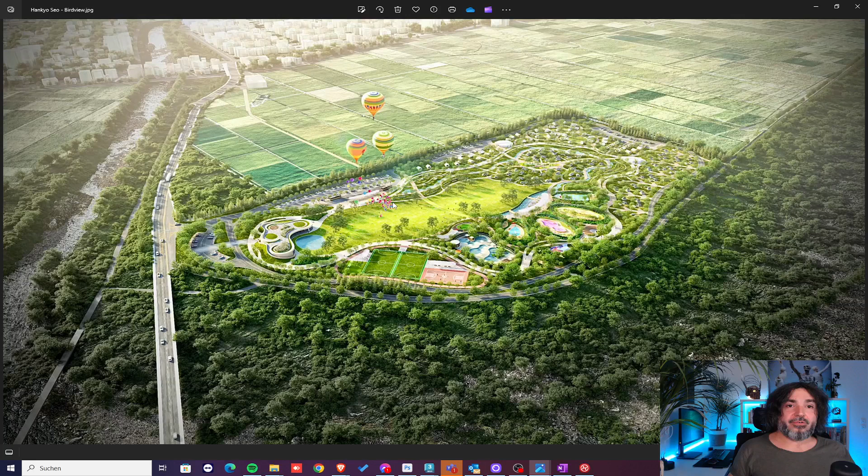Next, we have this one by Hankyo. It's a bird view. I didn't get any more information from him, but I think it's quite impressive and it's looking cool. Of course, I don't know how much, if any, AI is involved here or something like this. To me, it seems like at least these areas here are done with actual rendering. Of course, when it comes to the surroundings, there is obviously maybe matte painting and whatnot, all the possible means to create an image like this. But in the end of the day, what counts is how the image looks like, and I really enjoy the look of this one.